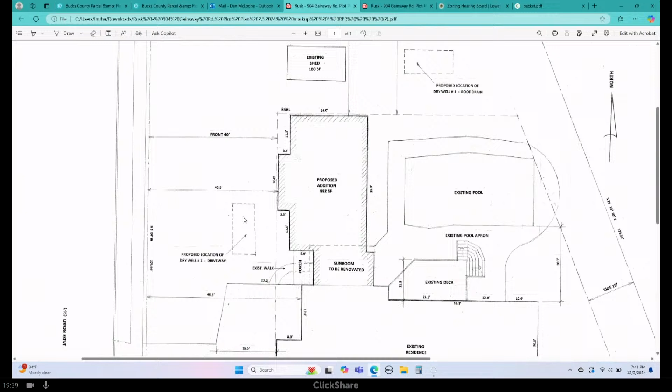Certainly, I'll open up if there's any questions or anything I missed, and I don't know whether Mr. Walker showed up yet or not, but I don't think we have a lot of dimensional questions here, and certainly the pits and how they would work are subject to final calculations and approval by the township, but we believe we're pretty close to what we need to do.

Thank you for explaining the topography, since that wasn't on the plan. That was going to be a relatively early set of questions here. We'll see if the other board members have questions. James?

So Dan, have you checked the calculations for the stormwater management? Does it mitigate back to an effective 18.9%? It does, I just verified that this afternoon around 2. Is that exactly 18.9? Yeah, because 330 cubic feet, 19.5.

So my next question is, I understand you were approved for 24.22%, I guess back in, was it 2003? Yes, the zoning hearing board approval. There's actually an approval in the 70s for something else from the zoning hearing board, but I can't figure out what that was for. So at that time, when it was approved for 24.22%, that would have been what its proposed was, and then which is now existing, although it's actually a little less, right, 23.42. But what I'm curious about is, what was your effective back in 2003? Was it the 24.22, or did you install some form of stormwater mitigation to bring it back to 18%?

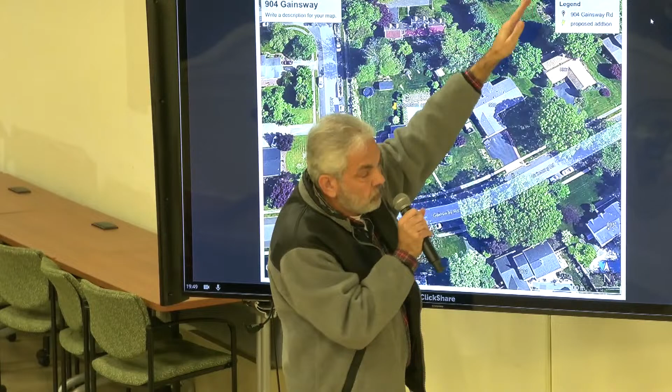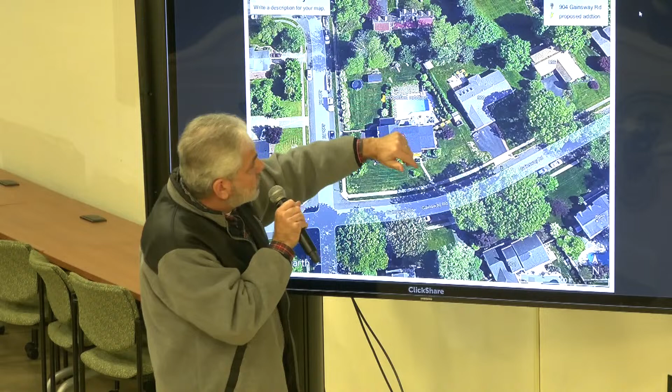There is a natural swale that runs from the rear of these properties down across Mr. Montgomery's property, Mr. Heinish's property. This is a 3¼ acre lot, and it runs and feeds Lake Silver, which is at the end of the development. So when Floyd hit, we took on a lot of water. And over the years, from time to time, poor pool management has resulted in water being pumped into the yard and winding up either in Mr. Montgomery's yard or into my yard.

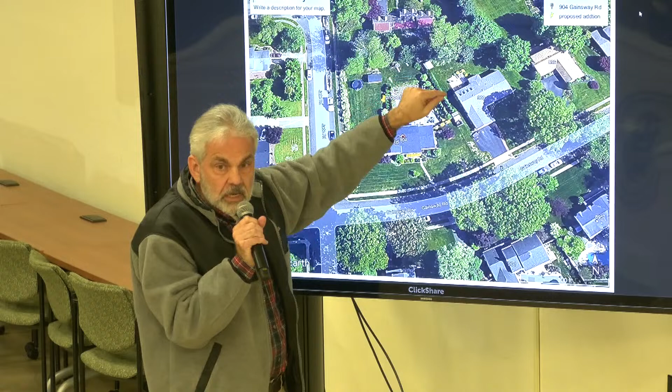I have spoken with Mr. Montgomery and Mr. Heinisch as well, because our #1 concern when we heard about the variance was - well, there were 2 things, but #1 was the stormwater management. How would we handle the water? So I actually tonight, after seeing the current plan you just received and hearing that it's going to 18%, I'm like, okay, this is good news. I like this. Couple of things to shed a little history.

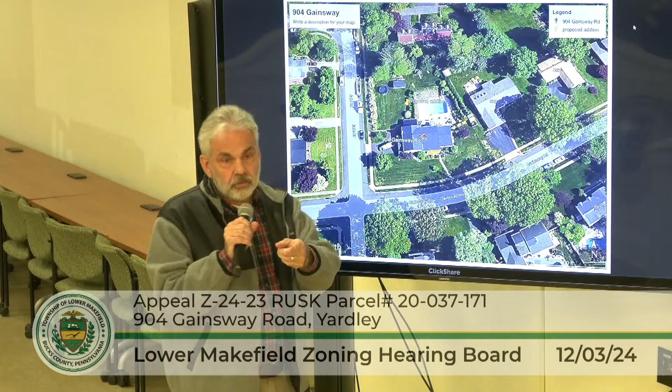The 2003 variance came about when the Kupreviches, who were the second owners, added this shed. To get approval for the shed, they also wanted to add more patio, but they were denied that because back then we didn't dig trenches or dry wells or anything like that.

I was actually surprised just yesterday to see this Google picture myself because I haven't stepped into the rear of the property since 2008 when the Kupreviches sold it. All of these pavers, including this fire pit area, I was not even aware of. None of that existed at all.

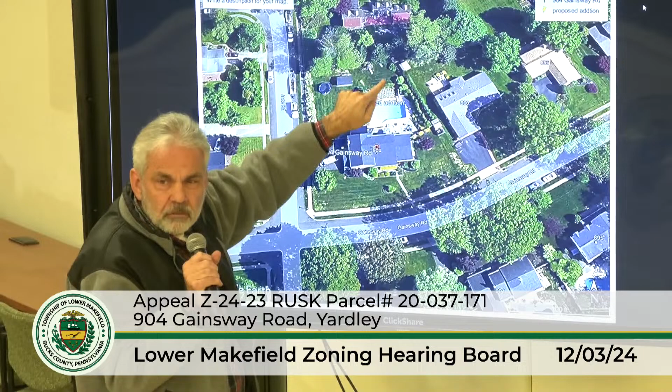There used to be a row of swamp maples planted back in '99, probably as a result of the original pool, to mitigate water accumulating at the rear of the property. But the elevation drops off from my property line to this paver area - not a far distance, but it drops about 3 feet. So I have this concern, just to be sure, that there's some guarantee the homeowners don't come back and add more impervious surface.

Swimming pools, I know, are not considered impervious, even though 6 months of the year they're covered and the water sheds like it does on concrete. I don't know the craziness of that, but those are the rules.

So I like the idea of the pit. They're located in an area that shouldn't affect things, though I don't know the capacity of the one in the rear - I don't know how these things work. What happens when they overflow?

What they are is designed for a certain volume based on a design rainstorm. Water that would run off - in this case a few hundred cubic feet - would be intercepted first in these pits. In a real heavy rainstorm, water's still going to run off, but that would be the case without the pits too, because the ground would get saturated around here.

Right, you still have that runoff - that's what we've experienced over the years. So this is a better situation for you? Obviously, yes, I agree.

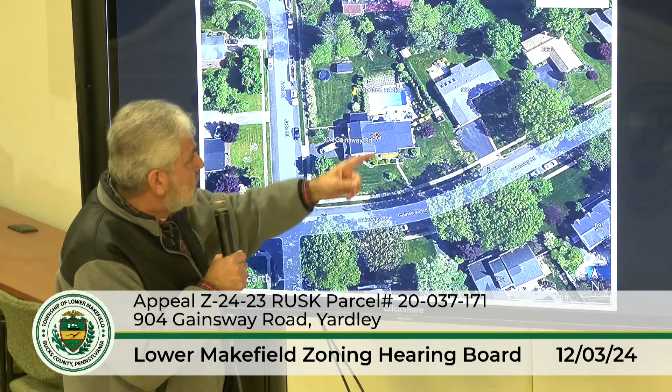But I like the 18%. I think the addition is great. There's plenty of space, I guess, for it.

But that's my concern - I just feel bad because I've never met your father. He never, whether in town or not, said anything like 'hey, I own the property' - you've not mentioned it, so naturally I was a little stunned about that. But I've been in the house 29 years, my wife works out of the house, we're always there, so we're very approachable, as you know.

So I guess we're in favor of the 18%, although the elevation hasn't been noted on the plan in case it has to be changed. Because where they're talking about building that one pit on the north side, rear yard, how would that impact the elevation in that area? There used to be those swamp maples, so I don't know what's below.

That's where - Dan, why don't you talk about how you would work with the Rusk family in terms of making sure the dry wells were installed in an appropriate area?

Yeah, I mean, we would, I can just make a couple comments. Yeah, go ahead, you might be able to explain it better than I would.

Mr. Horowitz, I spend most of my time in Florida, seldom in Pennsylvania, so I'm in and out a day at a time. Last time we were in town, I had hoped to meet up with you, but my wife was hospitalized and very sick, and I had to get her back to Florida so she could be treated by her doctors. So no, you weren't aware, but every time I tried to get in touch with you, I wasn't able to. That was my fault, nothing on your part - just my timing and the fact that I'm not in town very much.

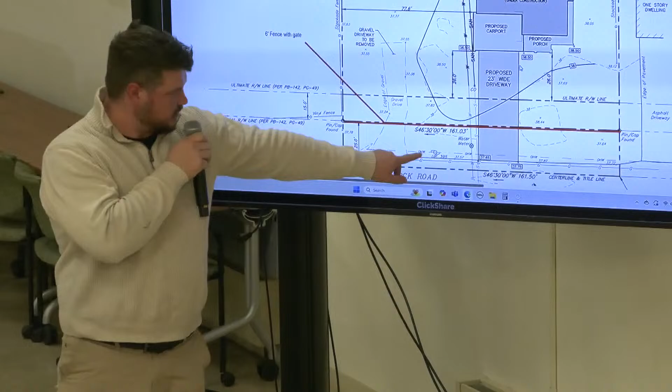When you were turning, I'm not sure what you're talking about, the line here, or the ultimate right-of-way there, because if there's rights that other agencies have... I'm not sure what that is, because the power lines go at this line and we are fairly back into it. It's the cutaway, you know, when you're at the corner there's a cutaway.

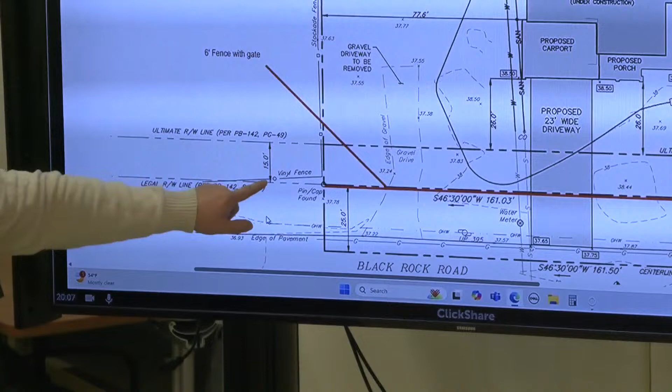So like I said, we match the neighbor on the left-hand side, so that fence goes from our property line all the way to the end of the street and turns into it, as well as the neighbor here, where we ended our fence as well. Both of those fences are permitted, just for context.

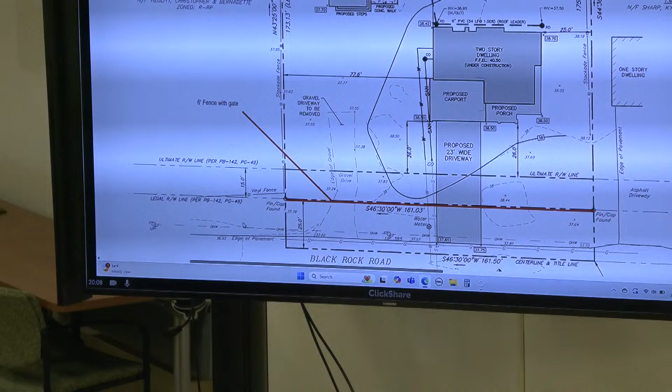Both of which fences, Dan, the both left and the right? Yes. So I had asked this question over email when we got the information. The fence to the left is a side yard, which has a different ordinance than a front yard. The max height for a side yard is 6 feet. Okay, and then you're saying there's a fence to the right that you match up with? We removed it. It was there originally from, I guess, the old homeowners.

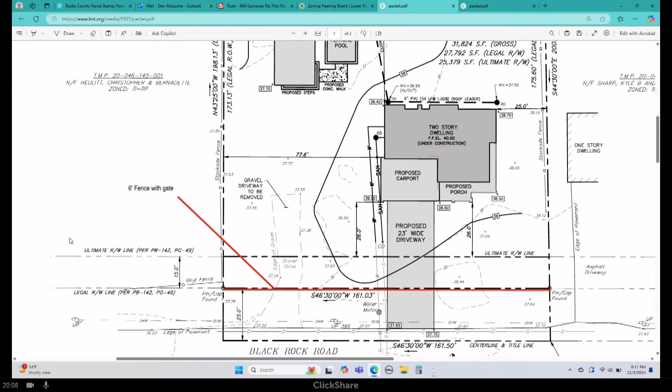It was also to this, and we constructed a completely brand-new fence from this end to that end. But there's no front fence on the neighboring property? No. Okay, that was the confusion. Yeah, I was confused as well. Good job, private investigator.